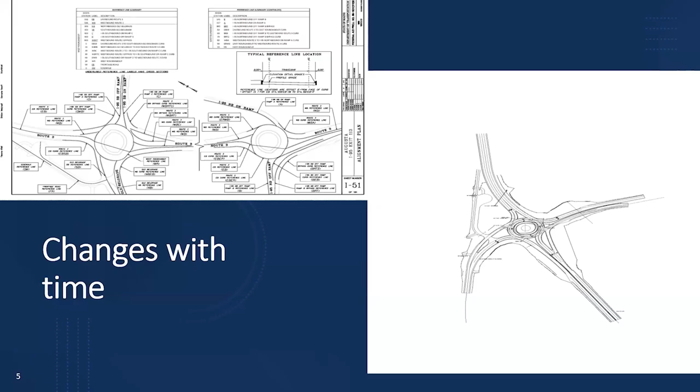With change, we've gone from paper plans to beginning the discussion moving towards 3D models. This is a picture of a roundabout in Maine in 2013 where we pushed through a model. Our contractor embraced the model, and the model with the little mini excavator shown below was their software actually showing materials management, how best to cut and fill and where material could go, because we were relocating an existing interchange and there was a lot of usable fill as part of this project. Using some of the software, they were able to maximize haul routes and maximize the use of materials, which is one of the things that going digital can allow us to do.

Lots of times in construction, that was 100% relied upon, with a superintendent or a foreman being responsible for planning out where things are going to go. Usually that was on the back of a tailgate with a half-size set of plans broken apart and bolted together with a couple pieces of wood to keep everything together. They basically built things in their head, and they organized their crews to go implement what they had in mind.

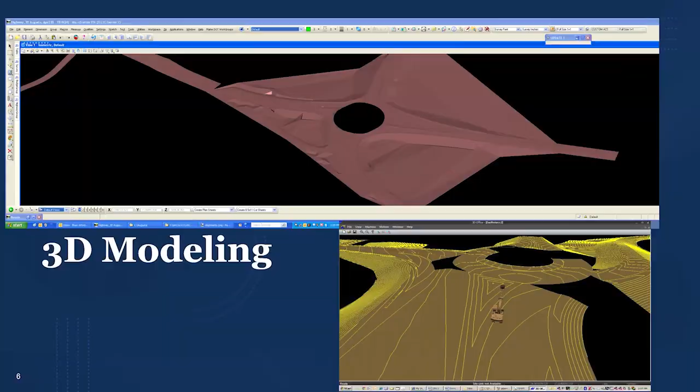So when the domestic scan panel was put together, the intent was to pull from state highway agencies what they're currently using in an electronic construction management process. Like I mentioned earlier, a lot of us are developing at different paces, using different products, different software packages. Some of them may be homegrown, some of them may be more of a commercial product customized to each state's individual needs, which is good, but it also can be challenging when you start talking about interoperability and sharing amongst different platforms.

Digital construction management also builds pretty heavily upon 3D modeling, as part of an e-construction documentation plan, digital as-built, and of course e-ticketing, which has been a hot topic in the construction world for the last few years, as well as unmanned aerial systems. We're finding more and more uses of unmanned aerial systems, and Ray in California and Aaron will talk about that this afternoon in a little more detail. And of course smart work zone project coordination using smart work zone technology is not only a technology that can help warn our traveling public and our customers about what's coming up, but it's also a safety factor.

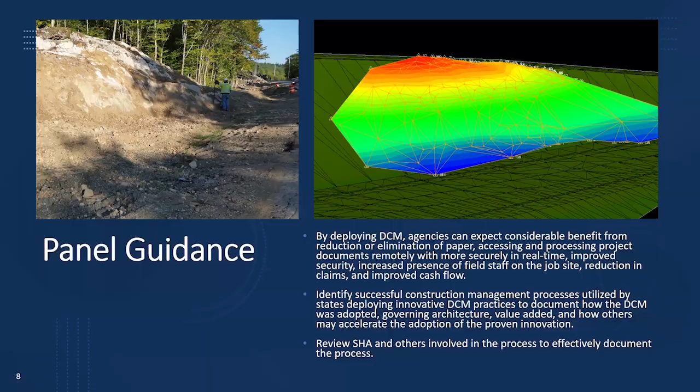The other thing that our panel was tasked with doing is we wanted to identify effective, accelerated deployment strategies for digital construction management.

You know, time is money. It's not only money to the contractor, but it's money to our users. Commonly when we have a large project, we'll do a user cost analysis, look at some different ways to shave time, and work through that to come out with the best product we can at a super high quality.

Working with our contractor here, we had 60 hours to remove 2 bridges on Interstate 295. This is one of our busiest sections of the interstate here in Portland. We completely removed it and put 2 new prefabbed bridges in its place, reopening it in less than 60 hours.

The video will kind of speak for itself, but again, using that accelerated view of how can we best minimize traffic disruptions, how can we create things off alignment and move them in. That analysis is not only aided by a digital concept, but it's also that collaboration between industry, design consultants, our contractor partners, and also the state agencies.

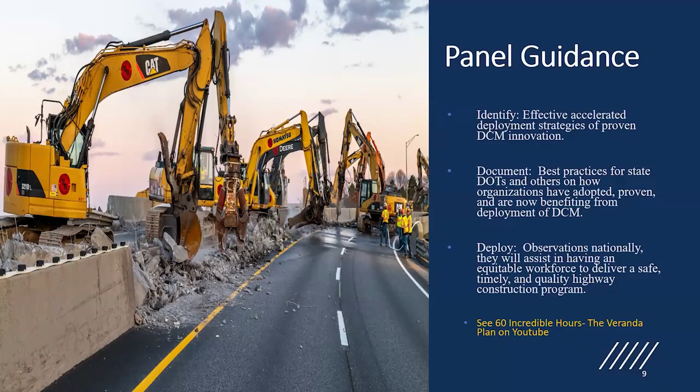Our panel consisted of John Hancock from Georgia, Brian Cawley from Federal Highway Administration, myself, Ray Hopkins, John Dunham, Tyler Carlson, Wade Johnson, Damon Ziegler, Jace McKeon, Eric Clausen, Charlie Bauer, and Chris Newman.

All of us actually participated in not only talking through what we wanted to get out of this domestic scan, but helping with the survey that went out to our states, coordinating our presentations from our experts on the subject matter, because each state has a subject matter expert on the particular digital delivery and digital construction management systems that each state is using.

So we all came together, came up with a plan. Then we went out and got our presenters, and we did a pretty deep dive into some of those technologies.

Again, here's some of the states that we actually did as part of our workshop. This was all combined into a workshop format where we actually had 5 days of presentations throughout the days from different states talking about different digital construction management technologies.

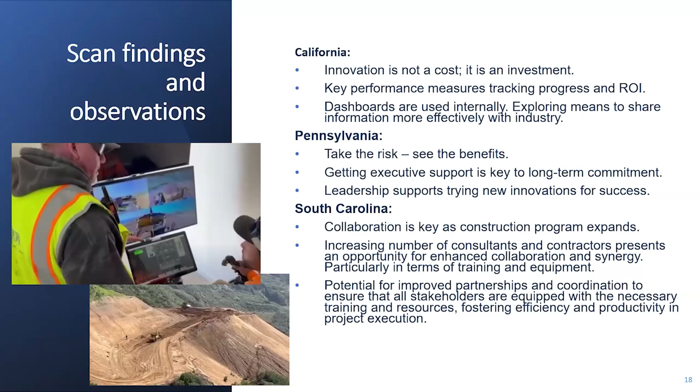So Utah focused on material testing in their construction management system. They developed this independently, but with that collaboration with AGC, they were receiving good feedback, and they had to count on the contractors to be innovative. That helps them progress, working once again in collaboration with our partners.

And then they're using their material management system as a single source of truth, a single source of information that is shared with them and the contractors for material acceptance, for payments, for quality assurance.

Sean said he's going to hit elations later, but when we think digital construction inspection or digital construction management, it's really easy to go to the robots and the BIM for infrastructure and the engineering side of things. But I think it's important when we look at it holistically, we continue to consider our labor compliance tracking, our prompt payment, our DBE programs, everything else that is part of what we do as state transportation agencies.

Georgia did a lot of discussion about e-ticketing. They began back in 2021 with their asphalt, and they're seeing expanding that program, looking at the success and the efficiencies that they've received, and starting to apply that to aggregate and concrete. And really, it just requires coordination with industry. Once again, this is the collaboration between the owner and the contractor, and I always say that together we're industry, and that collaboration is key.

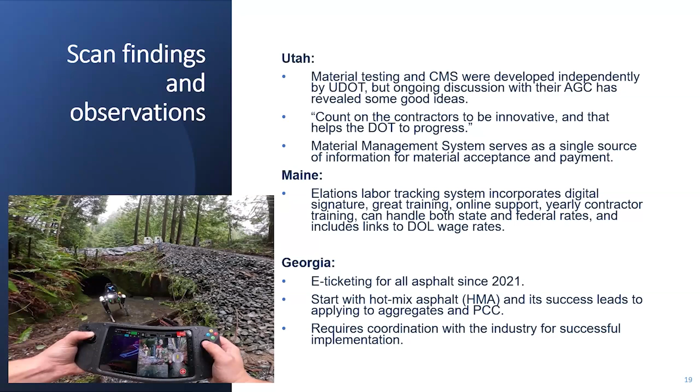So here, talking about some of the summary of findings, fostering a culture of innovation. It really is that this is an investment. It's not a cost. There is a return on investment that we're seeing as we track it, and other states were saying that as well.

But it requires that leadership support. And before we're spending millions of dollars on implementation of a system, we need to show that this system is a return on investment and being implemented in other areas. And that's why it's important to share information like this, sharing the resources with other states.

There's really no reason to reinvent the wheel, or as we say, R&D, rip off and duplicate. If something's working well in California, we're happy to work with other states, and likewise Maine. Any of the other states would say the same thing.

Partnering with our industry for the solutions. And then I put the motivating and innovation core. I'm going to introduce Aaron Chamberlain in a little bit, but what I see is that core set of energy, those employees that really want to make a difference. And when you have that core of employees and contractors that want to make that difference, we can influence the laws, regulations, and policies.

We can make sure that our strategic initiatives are aligned with embracing new technology. And we really have an excited group of individuals and groups. Go ahead, Sean.

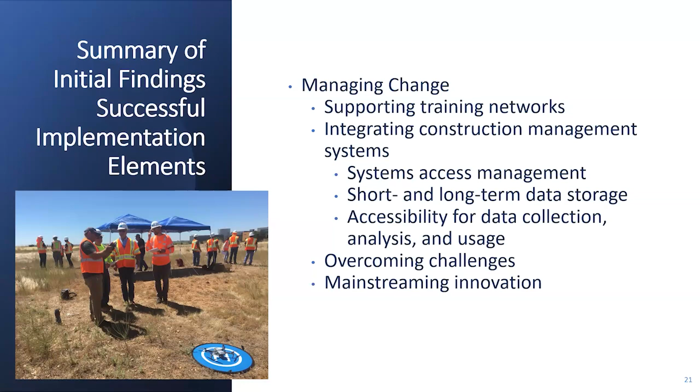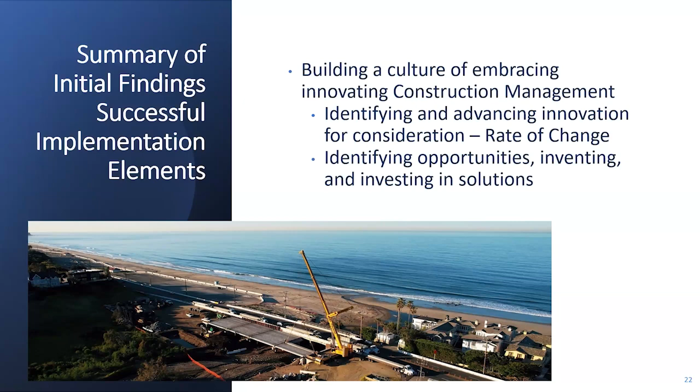This was uniform amongst all the states, regardless of what they were focused on in the study. They were all talking about having to look at that rate of change and identifying those opportunities, looking over the horizon. Go ahead, Sean.

So I mentioned a little bit about addressing the data storage needs. This was another universal topic that was coming up, the ability to have multiple types of data and files, looking at both the storage needs and the retention policies, making sure our current retention policies honor the vast amount of storage. As we're looking at BIM for infrastructure, we're looking at a huge amount of data. What is that data that's necessary to maintain, and what data can be transitioned?

At the same time, making sure your data is searchable and retrievable. Just having data for data's sake is irrelevant unless the right people can get it at the right time, and having those different systems being able to interact and talk to each other, having that common data language.

Another challenge was the number of user accounts that we see both for state, and as the contractors are feeding into that data, the number of user accounts and the security and hierarchy of needs there. And then the system compatibility. We understand our vendors are starting to talk to each other, making sure we're not going to be married to just one system forever, that the data is interoperable.

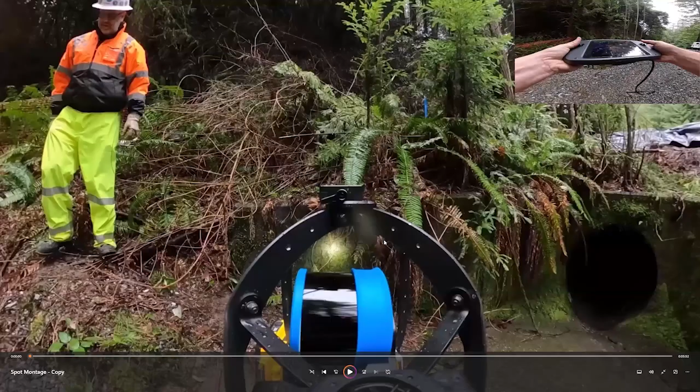Okay, before we open it to questions, I'll ask Sean to stop sharing, and I want to introduce Aaron Chamberlain. He is one of my engineers, and he's one of these core innovative minds. I often joke that I've given Aaron enough rope to hang me because I want to enable him to act. I want him to run and use innovation and do what he can. So I think he's going to cover both the investment that we had in our robotic dog and some of the savings, and then some of the work we're doing in collaboration with Alaska with the drones. So Aaron, I'll give the floor to you.

Thanks, Ray. Hopefully everybody is seeing a pause video. Give me a thumbs up if that is correct. All right, excellent. So again, Ray mentioned the robotic dog. What the heck could that possibly be used for? I'm going to show you really quickly.

This is our Spot robotic dog. This platform is made by a company called Boston Dynamics. We have equipped it with an Emesent Hovermap system, which is a SLAM LiDAR system.

This is one of its first kind of debut case uses where we found an immediate large return on investment. This is a failed culvert up on Highway 101 on our north coast, in District 1. A large sinkhole opened up in the middle of the roadway during heavy downpour storms, and the entire highway was closed here.

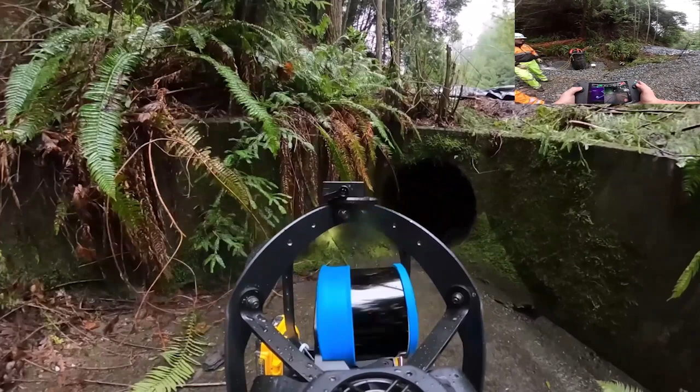As you can see, I've got a side-by-side view of the point cloud generated from the robotic dog system, the live video feed on the left, and up on top you can see the profile view. You'll see here that the entire culvert shifted and failed almost 1.5 feet down. Those things dangling from the top that look like traffic cones were traffic cones, sucked down from the sinkhole from up top.

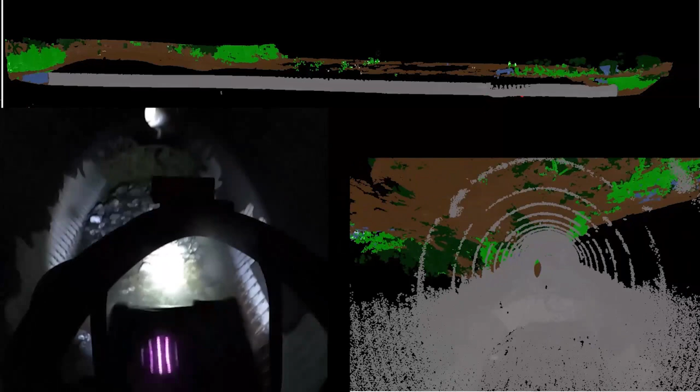The big picture here is, why did you need to scan it with this tool? Why couldn't you just do this with other means? Well, most likely we could have. However, the advantage here was in about a 7-minute scan we were able to walk the robotic dog through the culvert all the way up over the top of this site. Our engineers were very quickly able to download the data off of this system, quickly generate a point cloud, and then start to make engineering decisions based off of that.

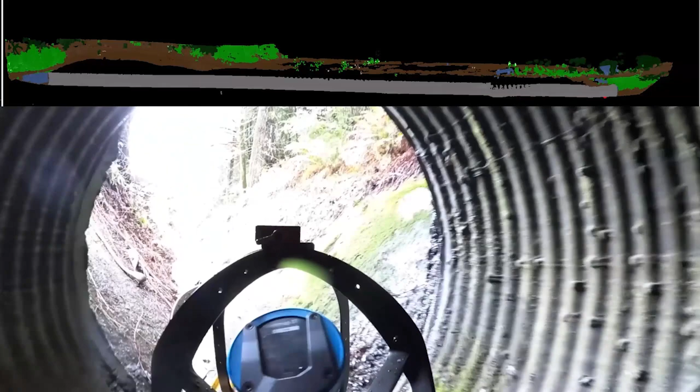I'm going to skip forward a little bit since you don't need to watch the entire video here. But this is where it gets important. Here we have a point cloud that's been classified and can be extracted. The most important thing we solved here was speed of quick engineering decisions that were sound and highly accurate. In this case, we were able to quickly ascertain the overall depth of the repairs needed.

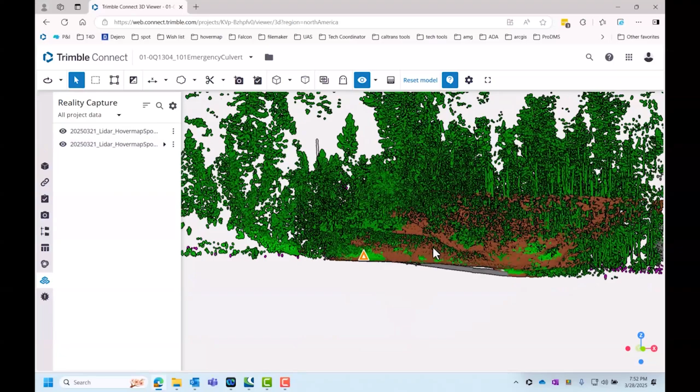And the length of the culvert, and actually the most important thing was a shoring design that we were able to quickly implement using tools from Trimble that we typically use, designing shoring and trenching that determined we were not going to have to do a cut bench into the adjacent slope, which best we can figure saved close to $100,000 in lost time and cost, because without having to use engineering shoring we were able to use standard shoring.

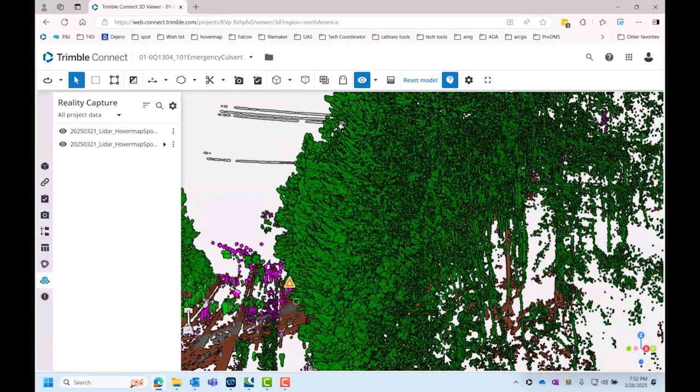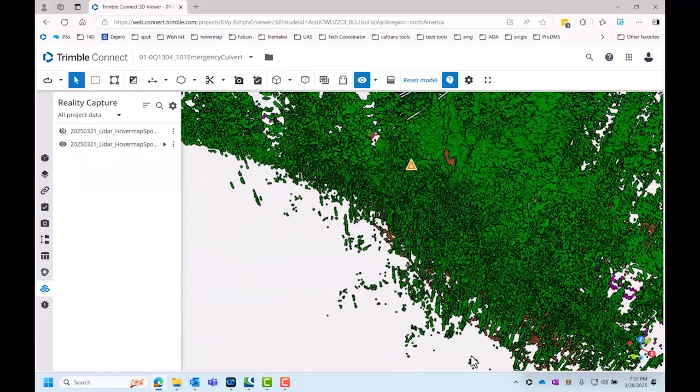We knew exactly how much culvert we needed, and with that we were able to very quickly make those repairs. I think they were complete with all of the repairs within 3 days. Typically those types of repairs take us in excess of a week. So again, less impacts to the public, no employees had to go do that entry, and we were able to get very quick, sound engineering-based decisions made with that data.

So again, it's a very similar case use here. This is inside one of our bridge soffits. We have a big project planned right now for this bridge. Again, this is up in District 1 where we've deployed the first robotic dog. We were able to walk through this site and scan the interior.

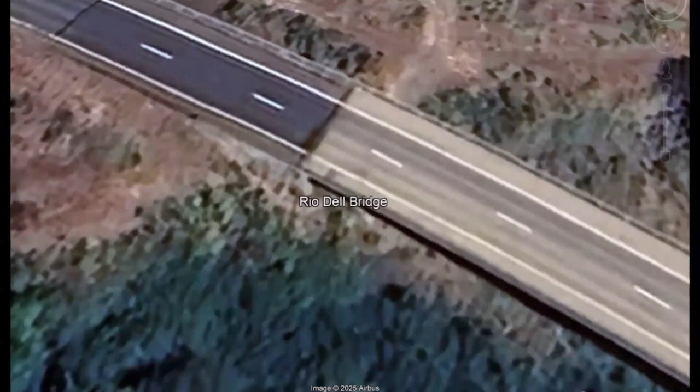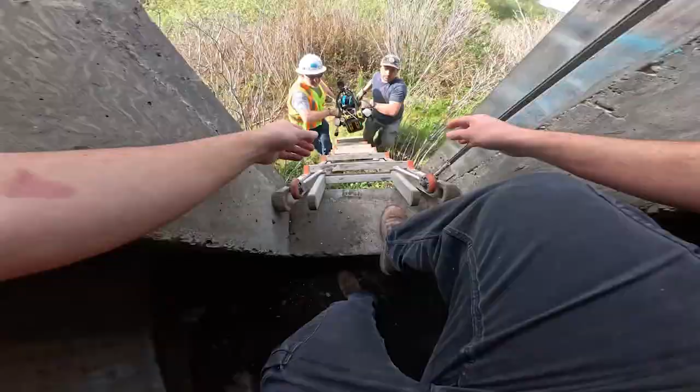Normally entering confined spaces like this requires a lot of additional effort. We may or may not need air sniffers, air handling equipment, et cetera, depending on what we have inside those environments. In this case, we don't have to do anything. We can send a robotic dog in. We don't need confined space entry permits, we don't need any of that stuff, and we're very quickly able to collect that data.

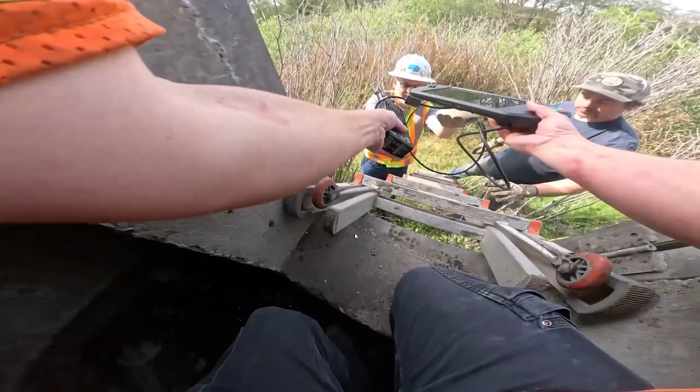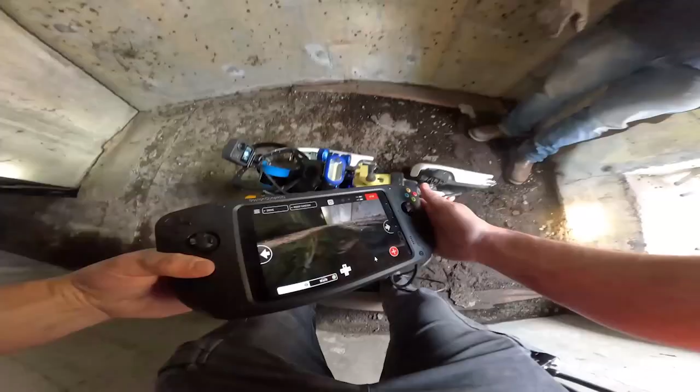I want to highlight being able to publish this into these connected data environments, or common data environments you might hear called BIM. So it's not just a tool collecting data out in the field, we're able to bring that back, federate it with design data, merge it with the design intent, and quickly make decisions and extract insights from that. That's what I wanted to share.

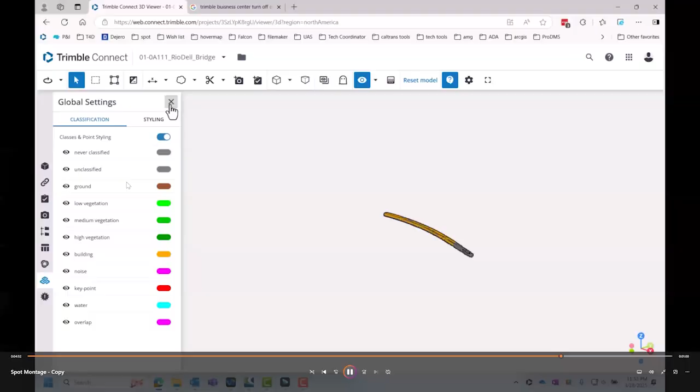When the dog walked through it, the big lesson we learned was that the culvert was not in alignment with the as-built—there was a kink in the culvert. If we'd done an exploratory dig from where the sinkhole was, we would have had a huge pit before reaching the culvert. By using this, we were able to laser focus our excavation and repair, saving a lot of time and money. I think the savings alone were enough to justify the cost of the dog.

All right, so the next thing I've got queued up is an advancement in unmanned aerial systems. Before I share that live screen, I'm going to share a portion of a video here.

This is a big initiative, a co-initiative with us and Alaska DOT. Both Alaska DOT and California DOT were recipients of a Round 2 SMART grant for the use of autonomous UAS systems, specifically dock-based. You can see here, Alaska DOT and California were co-awarded $12.4 million for what we're calling SMART Round 2, or SOAR—Scalable Operations and Advanced Remote Technologies. You can thank Ryan from Alaska DOT for the fun acronym there. This initiative is going to be putting roughly 60 dock-based systems in places all over California and Alaska.

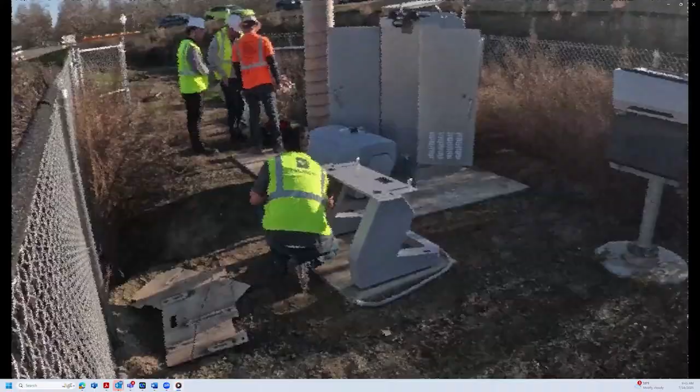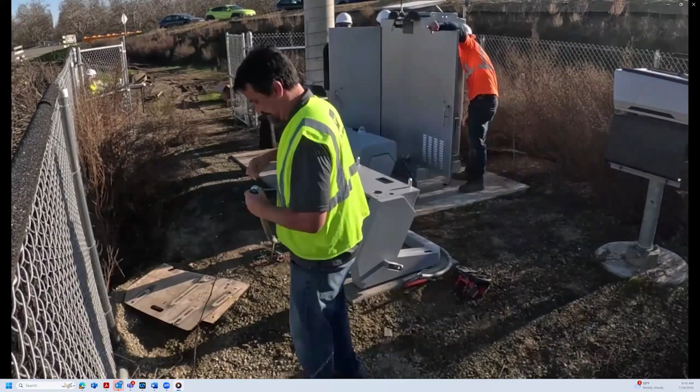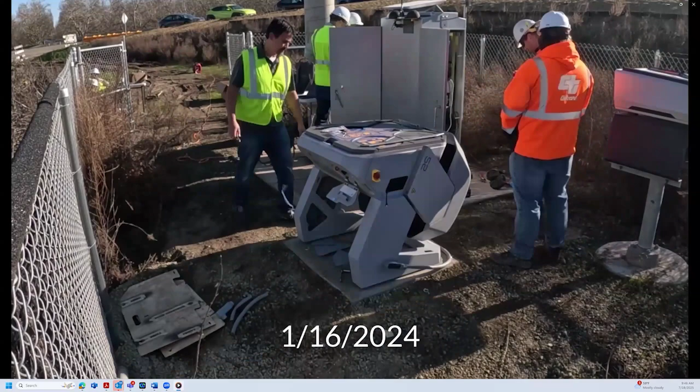So next question: what is a dock-based system? Drones used to be used where crews drive out, charge them, hand fly them from the site, collect data, bring it back to the office, and do the processing. That's been the way it's been since about 2016 when we started using drones. Well now these things can actually live out on the job site, potentially full time. That's the big innovation—I can fly these remotely, and all the data is transmitted via cloud, via Starlink, up to the different systems we want to connect them to. There's a variety of APIs available that I'll show in a minute for moving data from one source to another. But again, the huge innovation is we don't have to have a person on site.

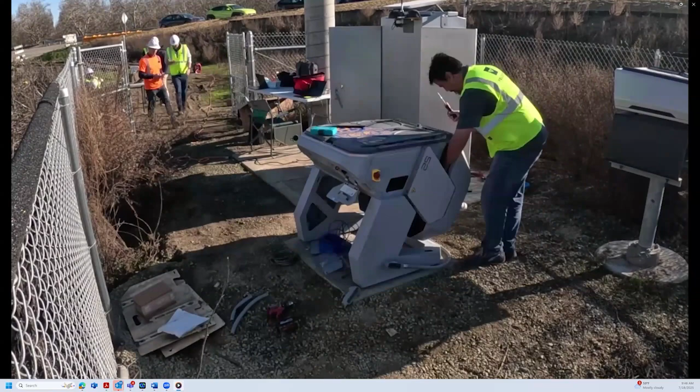Thanks to our partners at Skydio, we not only have an operable system but also waivers to operate it. Today, California has waivers for 107.31, 107.39, and 107.145 for beyond visual line of sight, shielded operation waivers, and operations over people and traffic out to a 200-foot shielded ops. Meaning we can effectively operate a drone within about a 200-foot bubble of our roadway or bridges anywhere in the state in Class Golf airspace.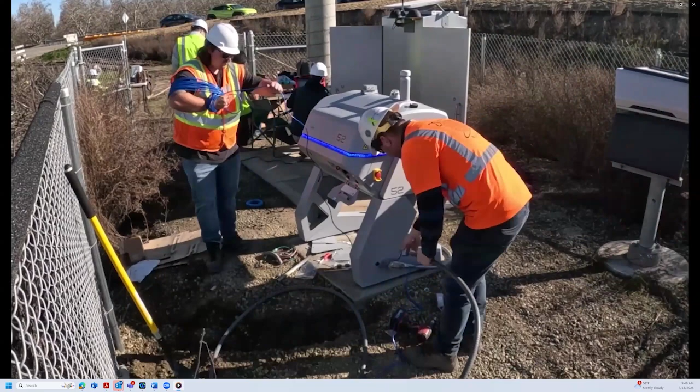We recently received partial approval for a major site you'll see here in the next few months, which will be Coronado Bridge. We'll be having one of these dock-based systems on one of our major structures in San Diego, in heavily congested military and Class Bravo airspace for Lindbergh Field. I think it's a major innovation there.

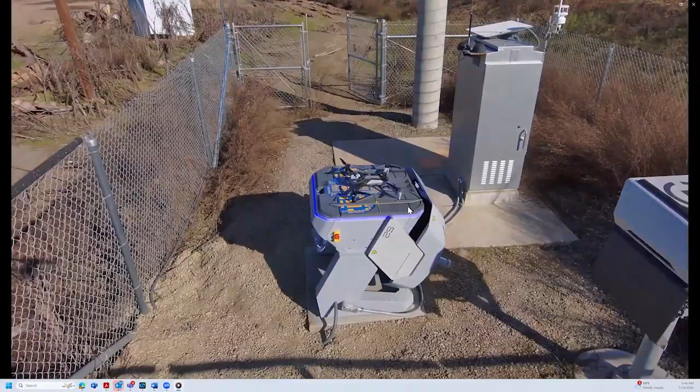Before this goes too crazy, I'll show the back end of this. The drone operations are one piece, but I actually think the area where we're seeing the most improvement and the fastest growth is in the back end—how these different systems connect to each other, and how I actually get real insights from a drone system. You're seeing here an API that connects from the Skydio system, from the Skydio cloud, into our Trimble Connect system, which is one of the connected data environments we're testing—our common data environments for BIM.

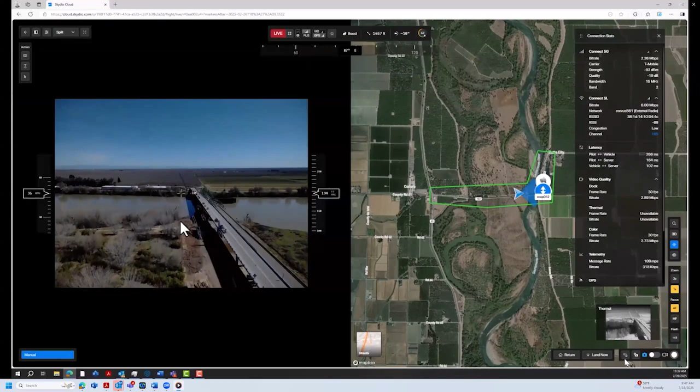With that, I can autonomously pull that data in, do my processing, and get to the point where I'm actually sharing this data. So what does that look like? Well, we've all seen structure-from-motion photogrammetry stuff before. Now it's happening without a person having to go out to the site, and that's really the big game changer.

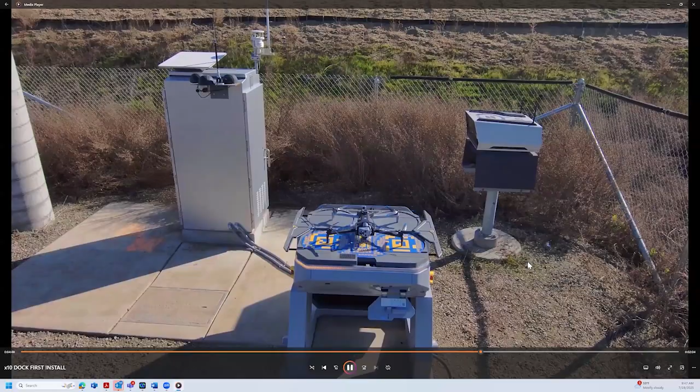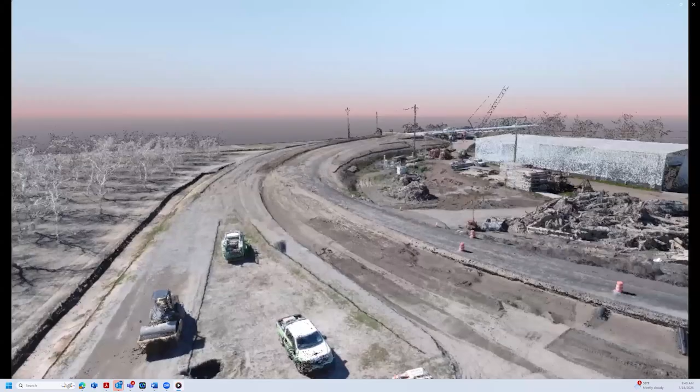So potentially every day I can have the drone fly the entire project site if I need to, automatically download all that data, process it, and turn it into highly registered point clouds. We're also seeing advancements in other rendering technologies like Gaussian splatting to enable ultra high resolution reality capture of our sites.

So I'm going to stop sharing the video and go to the interface, because I think seeing is believing, as we like to say. I want you all to see something.

So this is a point where I'd encourage everybody to get out their iPhone or cell phone, and Aaron will put up a QR code to scan. And it's not to make donations.

Give me a heads up if it looks like you're just seeing a web interface. All right, so I've already pre-flighted this system. I know my airspace is clear, so I'm glossing over a whole bunch of stuff on the back end that needs to happen for this to happen safely—rest assured, it's already been done and completed. But I'm going to literally fly a drone live. This drone is located about 50 miles from me right now, out on one of our active construction sites.

So you'll see the system getting queued up here, and before I take off, I need to be paying attention to the interface. Y'all should be seeing a QR code—give me a thumbs up if you got one. All right, I'm going to give people 10, 15, 20 seconds for that.

That's going to be really critical, because what I'm sharing back through the screen is going to be heavily degraded data because of the streaming interface. But if you're connected via your phone, you're going to get a full 1080p video feed that's live directly off of this system. I'll give people a couple more seconds, and then I'm going to go ahead and launch the drone.